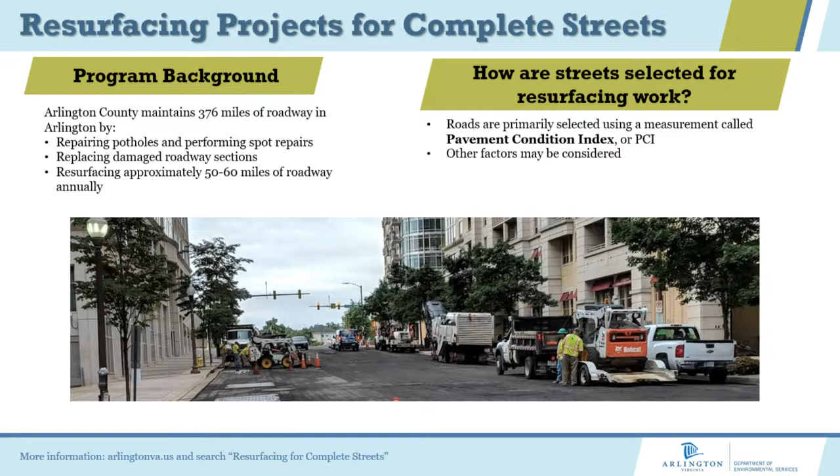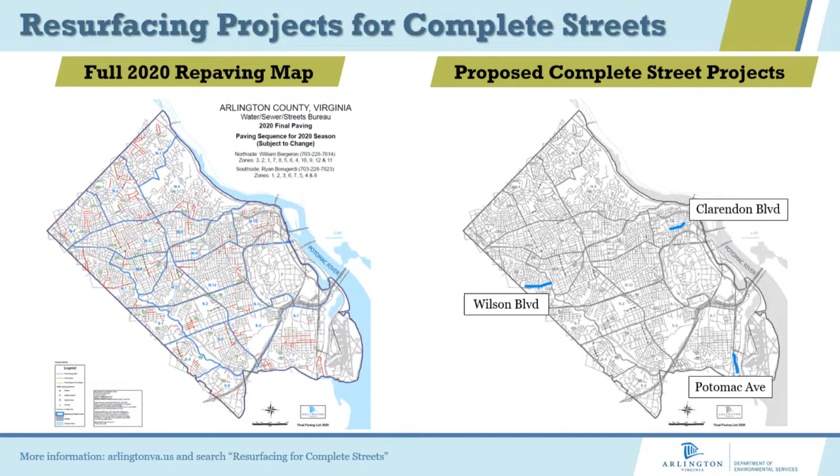I did show this at the first meeting as well. The map of Arlington on the left is showing all the streets on our network, and the ones in red are scheduled for repaving this year. The graphic on the right shows the three key streets where we're looking for specific opportunities to evaluate how we can improve safety and operations. Those three streets, in order, are Clarendon Boulevard, Wilson Boulevard, and Potomac Avenue.

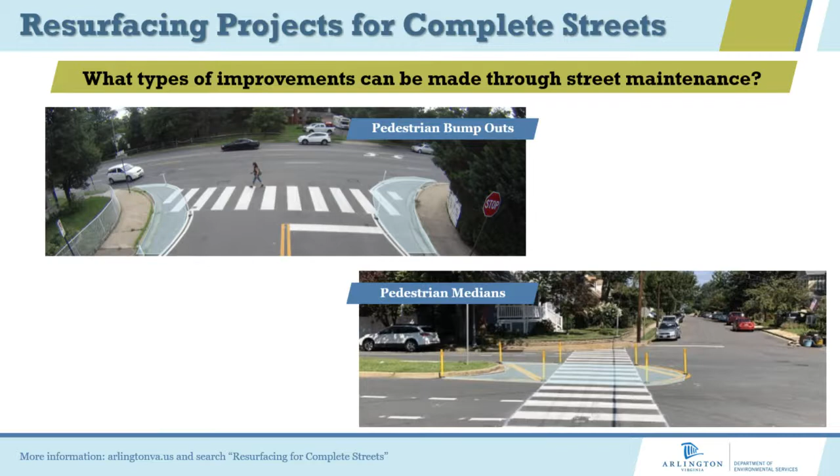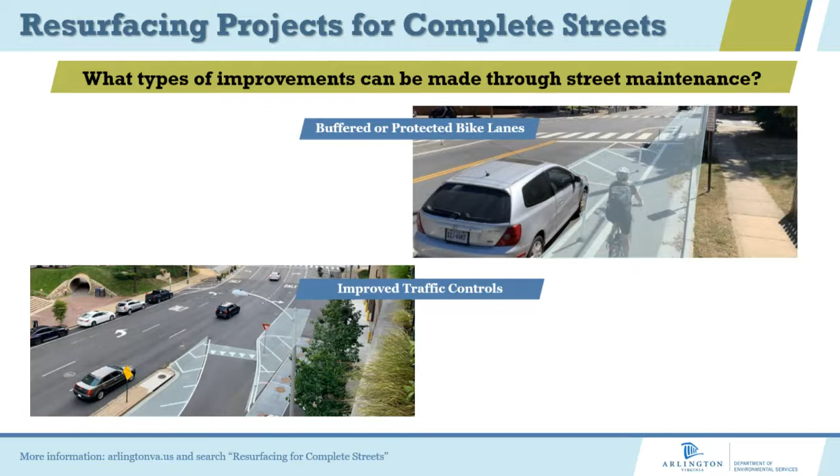Most of them, of course, help improve pedestrian crossings. All of them provide separation. Again, if you have separation, the idea is you have fewer conflicts. All of them also help reduce or control vehicle speeds by leaving less wide open space where vehicles can drive more randomly.

2 of those, the bump outs and the improved traffic controls, improve sight lines, and in general, the improved traffic controls also make the street easier to understand for all users. So a lot of multiple benefits you can get from these types of measures.

And I think the only thing I would add here, Dan, is that one of the reasons I want to show you this is all stuff that the team has done in markings and bollards. So all this stuff can be implemented through the restriping and remarking program, which is what we're talking about now. So it's less curb work, ramp work, any of that, but we can still get a lot of those community benefits that we might have to wait to build out fully in the short term.

Yep, absolutely. That's a good point, Aaron. It's trying to find an opportunity to do something more immediately. We identify a need, then it gives us the opportunity to do something rather quickly.

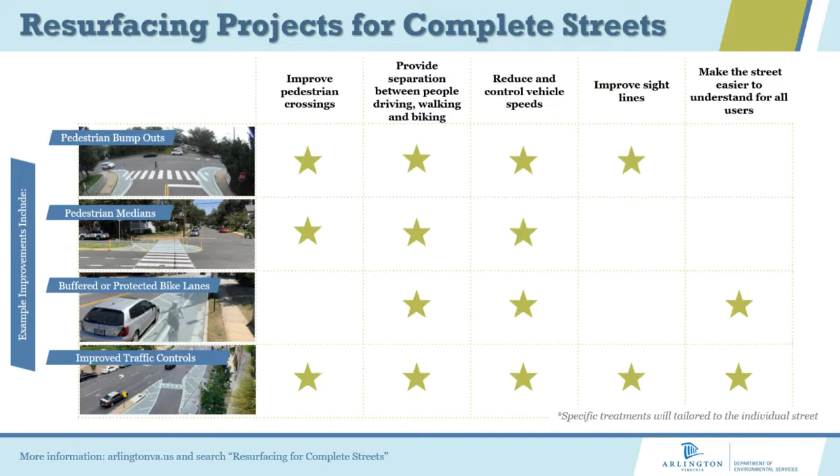So there's the general background. We're going to turn it over to each of the designers for each of these projects to talk about their specific streets, that they looked at the feedback, looked at some of the background information, and then took that to create designs. So the first person that's up is Maggie. Maggie, Clarendon Boulevard.

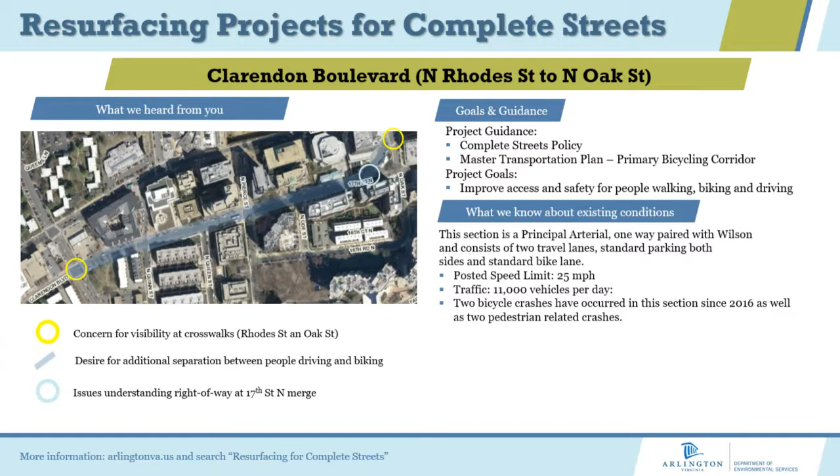Should we go through the goals and guidance? No, go. I think they've seen it before. Okay. So go to the next slide then. Okay.

So this is what we started with down here at Rhodes Street. In that first block we put protected bike lanes, which means putting the bike against the curb and moving the parking lane out. Also, we moved parking back a little bit so that at Quinn Street you could have a better sight line trying to pull out of there. So we continued that protected bike lane. We enhanced all the crosswalks to have high visibility crosswalks.

We went to the next block and had the same new protected bike lane with the bikes against the curb again, and not losing any parking there. And actually, I think we gained a spot there. So those first 3 blocks, as you can see, are all protected bike lanes, all parking pulled out and the bicyclists to the curb.

We have consistent driving lanes throughout here so that there's room for buses and larger vehicles. What else? I think you could go to the next.

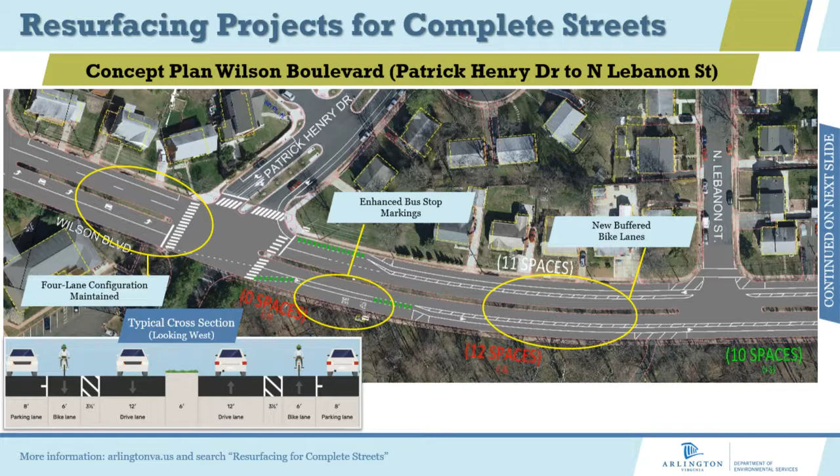Are there other questions? There's a question for Wilson, wanting to know if there was a difference in the 85th percentile speed on Wilson. Is it different between the westbound and the eastbound? Do we look at that differently? Sergio, do you recall? Not off the top of my head. You know, we can take a look at that in more detail though. Perfect. Yeah. Quite a lot, actually. Okay, yep.

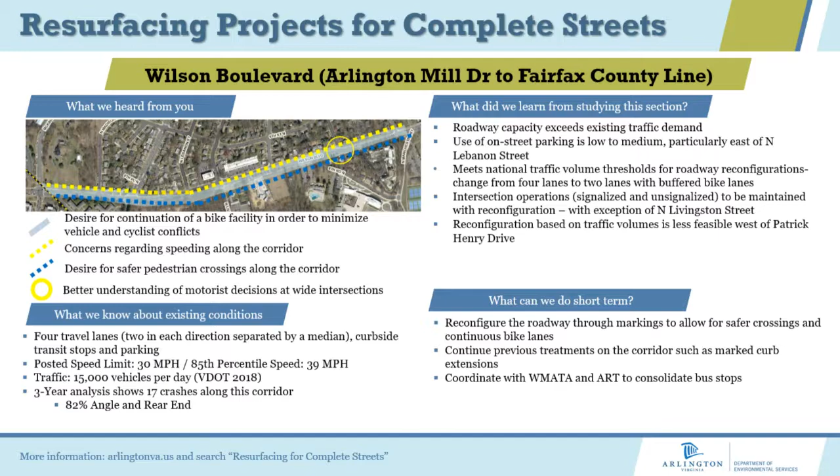There are some for Potomac. I'm just going to try to address those. So one of the questions we had was if we have enough space for essentially the double buffers, why not flip it and do a protected bike lane? Similar to Wilson, we had this same issue where, with the fire code, we have to keep that 20-foot clear. So if we put the parking lane up against the travel lane, where we have the medians, and especially if this is a planted median, they look for that 20-foot clear throughout that whole section.

So in order to kind of use up the space, that's where we came up with the double buffered concept, and that would comply with the fire code throughout this area. Another question we got was, why would we want to add more parking in this area? The answer to that one is on the northbound section. We look to add that protected bike lane because it's actually a physical barrier between the travelway and the bikes, which will actually provide better separation and more safety for the users instead of just having that hatched out.

I think I saw another one was if we're going to provide bollards, particularly in the area with the on-street sidewalk. So the answer to that is yes. We're also looking into using a combination of vertical delineators. As a county, as curb stops, we've been looking into those devices, and we haven't quite chosen one yet. But this would be a location that we would implement that.

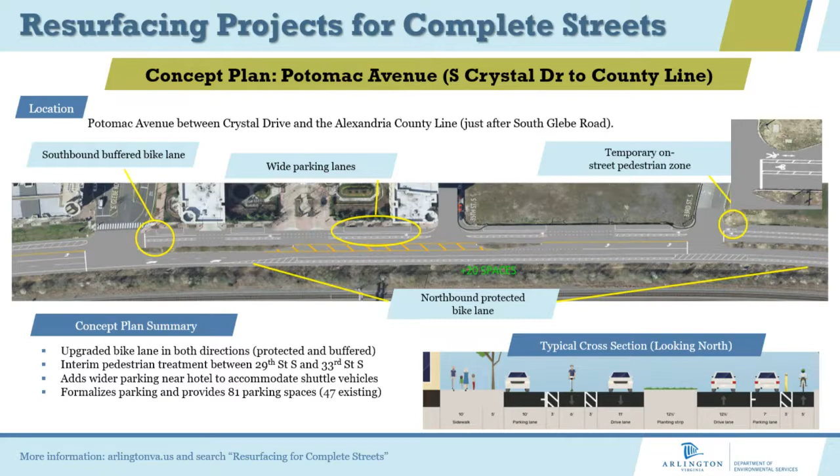If you don't have it, I think I got one here about the Virginia law change. Yeah. So I'm not really clear what the specific question is, but it sounds like it's the change of the Virginia law from a yield to a stop. Right, but only at a marked crosswalk. So the question was, did we consider that when looking at places to put in crosswalks? Or I think specifically on Clarendon. Specifically on Clarendon.

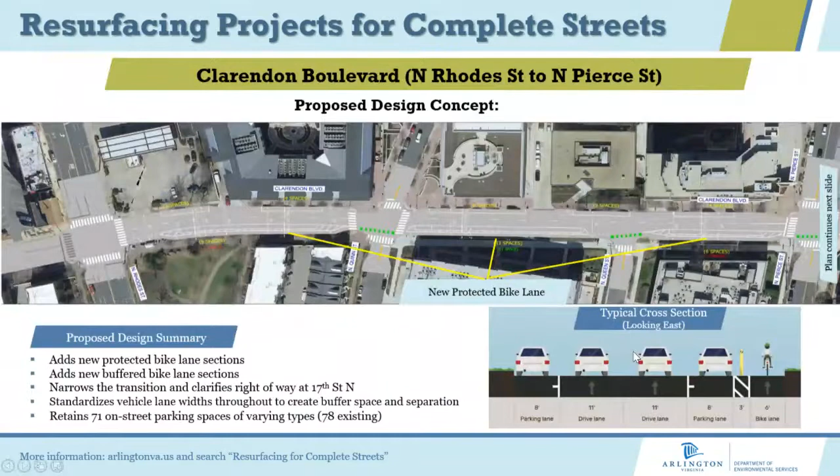Yeah, so on Clarendon, we have crossings at almost every intersection. There is this longer block here where there's not a crossing. And there's really not the infrastructure that would support that right now, but that is something that we can look at for future implementation, certainly. But yeah, most of the crossings on Clarendon are signal controlled, or many of them are.

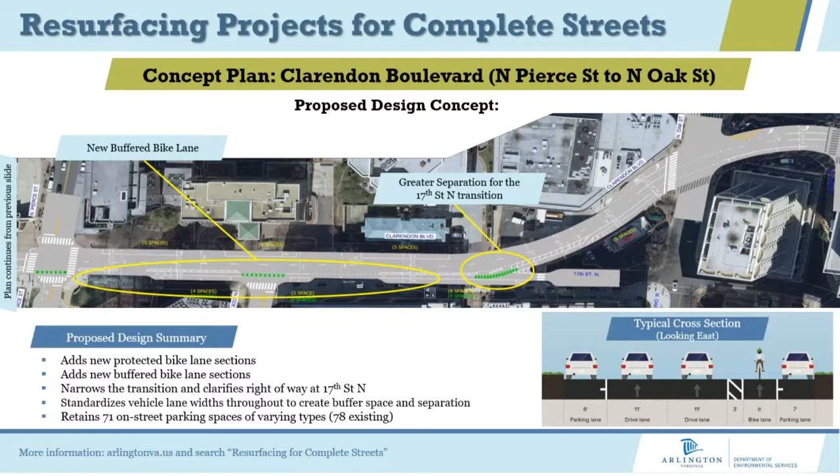I wanted to mention that on Potomac Avenue, we actually worked with fire and we got an exception for the northbound side to put in that protected bike lane, because that also wouldn't adhere to fire code, but since it was up against the tracks on that side, knowing that there will never be future development on the east side of Potomac, they allowed us to go and add that protected bike lane. And since there's nothing on that stretch, you also won't have to worry about sidelines, driveways, etc. Right.

Oh, and another thing I wanted to add on that, because I did see a question with east-west crossings. This is something we were looking into, but currently there aren't the infrastructure ramps to provide that, and that would require that construction happen. So it is something we're going to continue to look into and see if we can improve that, but it would not be tied to the repaving program of Potomac Ave.

Yep. And I have another question here. How will we maintain the paint and bollards? They sometimes get destroyed. Yeah, that was the shortened version of William's question, which was a general question for all the county projects, which is kind of how do we maintain the striping, markings, paint, and bollards? Sometimes they get destroyed. Well, I might even go out on a limb and say they get frequently destroyed.

But we track those. We have mapping in GIS. We track those. Again, we try to replace them as often as possible. We certainly do a run through a couple times a year, like at the beginning of the season and midway through the season. In the winter, we can't put them up really as much because the way that we use most of them is that we basically glue them down, and it's weather constrained as to when we can do that. But that is something that we do.

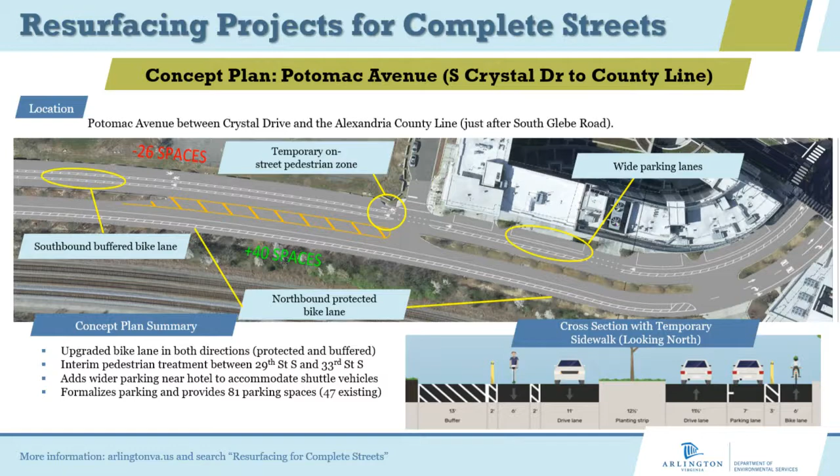So I think this is a good question to address. Alan or Eileen, sorry if I got your name wrong, lives in Bluemont next to the part that already has the 2 lanes, and they note that there's a center turn lane. So the question is, why can't we rip up the median strip and make a center turn lane? That's a good question. That's something that we looked into the possibility of doing. Given the scope of this project, which is pretty much repaving, we didn't see that was feasible.

Part of the challenges of ripping up this median is its length and that it is used to divert stormwater. And, not to get too technical, but the road is double crowned, meaning each side of the roadway has a specific grade to help promote drainage. And that drainage goes to that median area. So it's not like you could rip it out and then just put pavement over, which we do at times. I know you've probably seen us do that at times where we can. This we couldn't do because it does have the complex stormwater. And anytime you deal with changing stormwater, it's a whole different scale type project because you have to dig up the street, etc. It becomes trifold, maybe even tenfold in terms of cost. But that is something that we did look at, and unfortunately, we're constrained by that right now.

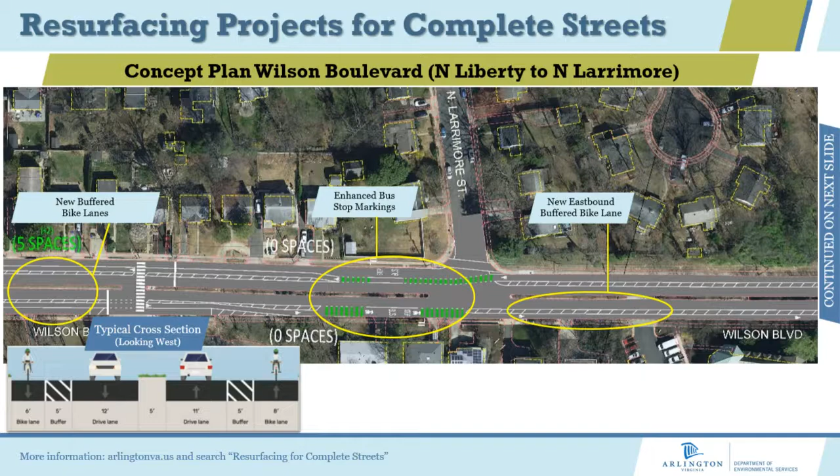And I know it's something that has been talked about with this neighborhood in terms of a capital improvement project plan, and so that's a different team than what we're working with. We're working on those short-term improvements. This work doesn't preclude that possibility, and in fact is even a sort of test run for making effective changes. Right, and that's a good way of looking at it too. It is kind of a test run to see how well the two-lane operations work. And we are analyzing other future things on Wilson too that could be potential improvements, such as potential signal upgrades and other things. But the scope of what we're looking at now is pretty much just the paving and remarking.